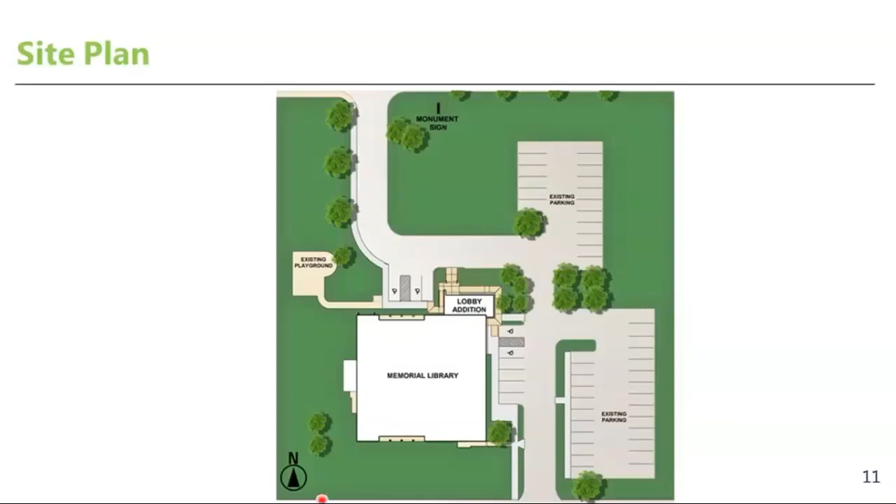Starting out on the street, on the left you'll see the new monument sign, about 15 feet tall. The area in white is the new digital board that will advertise future events at the library and let everybody know what's going on. The increased size of the sign will make it much easier to find as you're driving down the street. The materials include colorful metal panels done in blue to reflect our good neighbors at both St. Mary's and Memorial High School, and we're bringing in a base of the brick from the original building to honor it. In the distance, you can begin to see the new lobby.

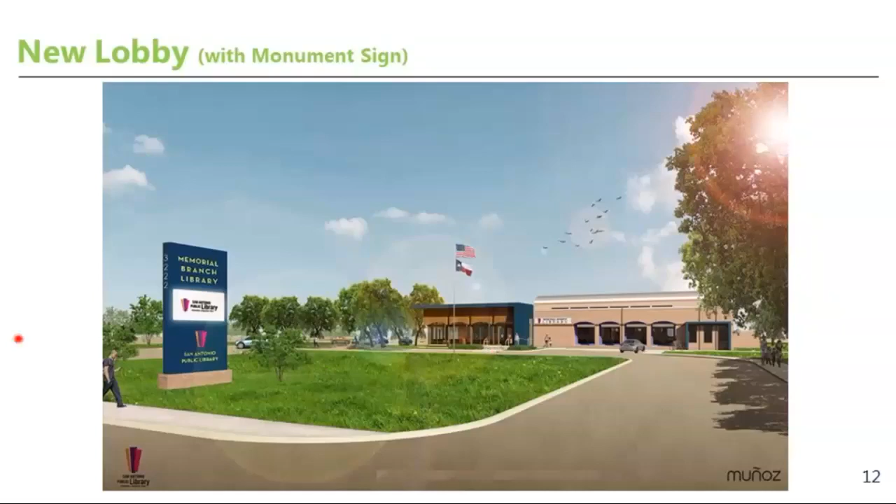Here you're moving in, driving up the drive, and you can see the metal panel element that forms this new lobby, with glass infill. So you'll have this great space with natural light. This will go on the front of the building to transform its look. We also brought in some sunshades, those stick elements you see just underneath the blue metal on the new part of the building.

Those sunshades are done with an arched shape that reflects the architecture of the original building, visible to the right. We also added new windows into the teen area there, and another sunshade element done in blue metal to tie it back to the lobby addition. In the existing window insets where the arches are, we've added some blue tile, which will help tie everything together. Everybody talked about wanting to see some color added to the front of what was otherwise just a plain brick building, so we think that's going to do a lot for the visuals.

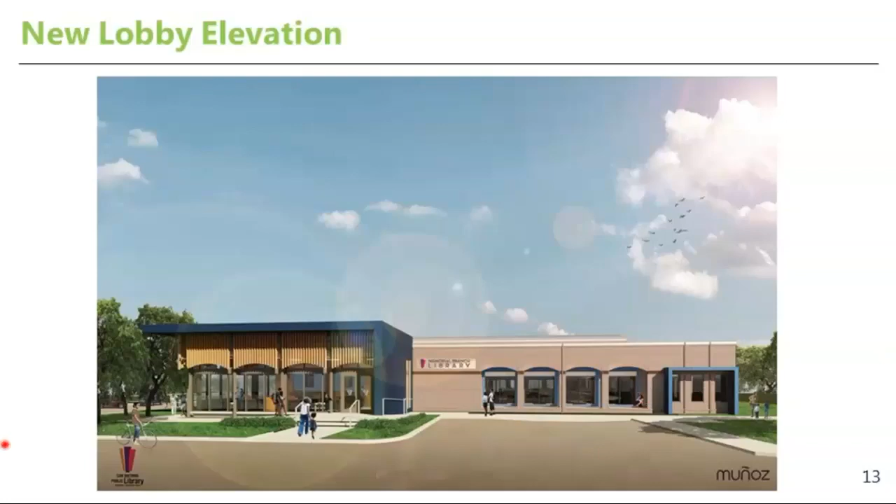Here's another angle of the front where you can really see the sunshades and the big blue overarching element that defines the lobby, along with all the new glass that will let fantastic natural light into that space, making it a great reading area.

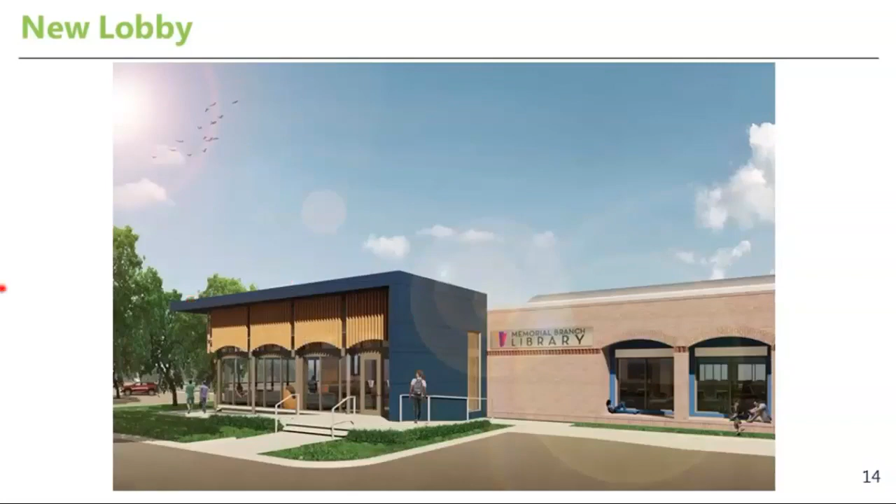Here you're stepping inside the lobby. This is an all-new addition, and off to your right is where the original building starts. We've set up this area with lounge furniture so you can check out a book and hang out and read in the shade of the tree outside, with all this great natural light coming in. Very modern—notice the rings up there, which are light fixtures with all new LED lights, bringing a whole new light quality into the space that's going to make it feel super nice.

On those existing brick arches, we've added some more of the tile that I mentioned on the exterior there. And down below that are two stainless steel elements, which are going to be the memorial monument that honors the veterans of San Antonio in this space.

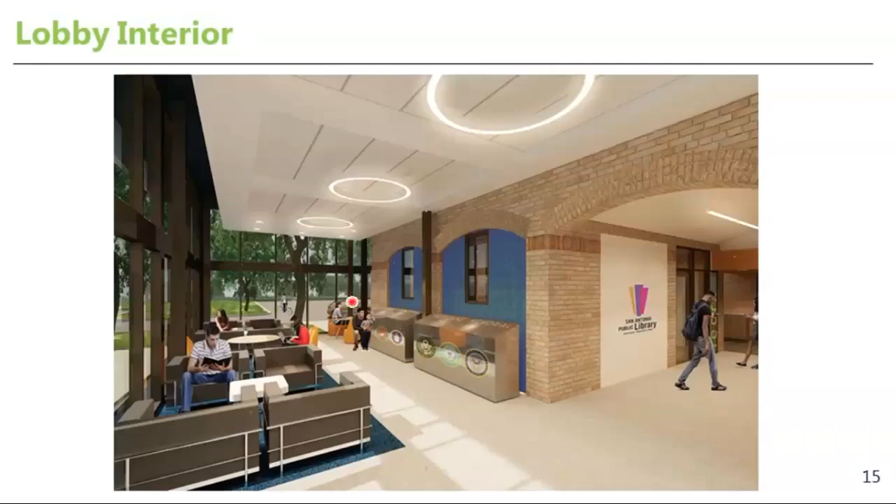Let's move in on that. We're still working on finalizing this design and getting all of the text and information that's going to be on the monument. Right now we're showing the seals of each of the branches of service, and there will be some text talking about the service of the veterans of San Antonio and what they've done to help protect our freedom here.

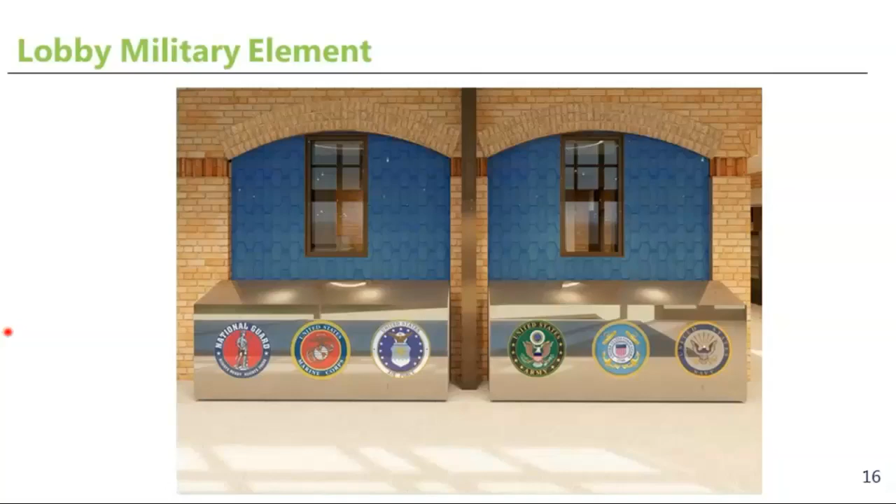And there you see, again, the blue glazed tile that we've added in the insets of those existing original arches. Let's go to the next slide.

This is one of the things I'm really excited about. We have, as Ramiro said, done a complete transformation of the interior of the building. Every material and surface that you see and touch inside is going to be new, and it's going to be great. We've really listened to the comments from the last meeting and created some new spaces within what was once just a pretty big single open space, creating specialized use spaces, which we're going to get into in just a second.

But one other thing before we go inside the building: we've also made sure we've provided several barrier-free ways into the building, so that if somebody has a difficult time walking or is in a wheelchair, it's going to be easy to get to the new lobby from all of the parking spaces and all of the various paths leading into the building in a good, barrier-free, accessible way. All of these paths are barrier-free.

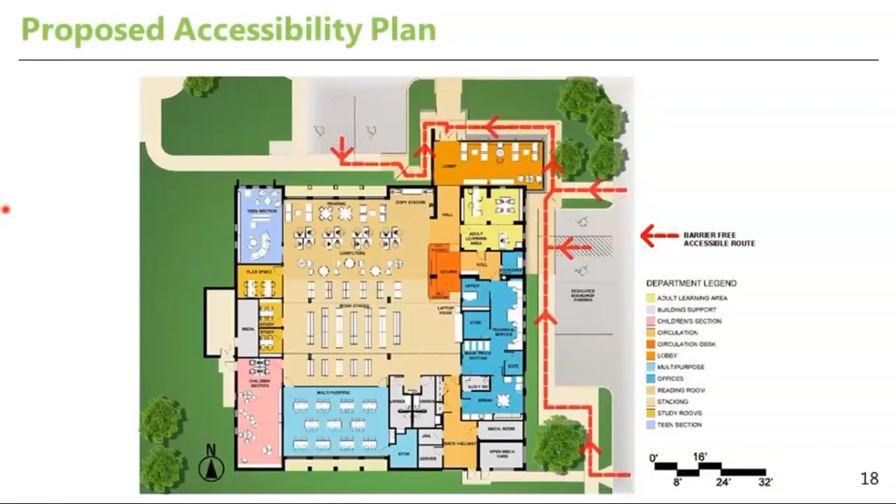You'd come into the new addition, the lobby space right there, with the lounge furniture and the monument at the back. Then you'd go into the hall, and the area that used to be the circulation desk is now going to be the adult learning area. At the end of the hall, in red, we've combined the circulation desk and the information desk together so it's going to be more efficient, and easier for visitors of the library to get any help they need right there in that one space at the new circulation desk.

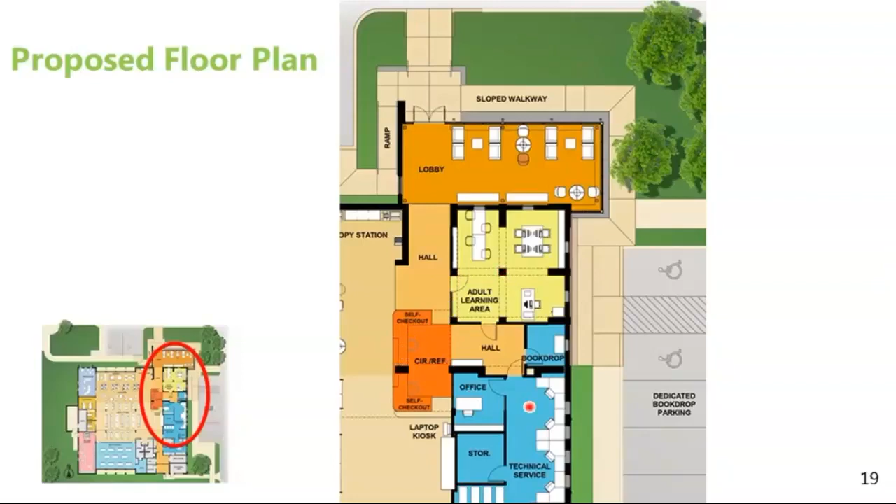And immediately below that, you'll notice we've got a laptop kiosk so people will be able to check out laptops and have real access to technology in this new building. It's going to be fantastic. Let's go to the next slide.

Okay, so we're jumping across to the west side of the building now. Again, one of the things that led to the most spirited conversation in our last meeting was the need for some specialized spaces where activities could happen that might create some noise, and being able to separate that from the main reading area.

So what you're going to see here is we've got a dedicated teen room, with its own unique furniture specially for the teens. On the right side there's a glass wall that separates it from the main reading space, so they can be having activities and talking in there without necessarily disturbing any of the other patrons. It's going to be great and allow for a lot of multiple and flexible uses within the building.

The next three spaces down, shown in that orangey yellow, are flex spaces, and then two small meeting or study rooms. Really, these are multi-purpose spaces: sometimes they can be used for group meetings, like if people are working on a group project together. But one of them could also be dedicated as a quiet room, where if somebody really wanted quiet, they could set that room aside, and the only people in there would be being very quiet, so you could really focus on what you're doing.

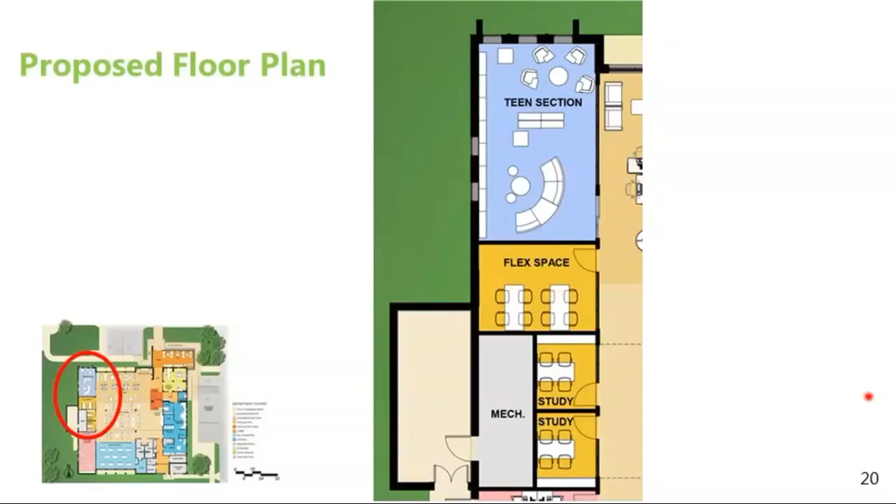So now we're moving to the south here. In the pink there is the children's area again. You notice it's got some unique and fun furnishings specific to the children's area. And again, it's closed off. It's got glass on it, but it's closed off so that if they're doing a learning activity in the children's area, it will be able to happen without disturbing other patrons in the building.

Immediately to the east of that, we've moved the multi-purpose room from its current location and made it larger. It's got great natural light on the south, so it'll have access to all those windows. On the north side it's also got windows that allow it to look into the main library. We're going to have all new furniture that's very flexible so you can push tables together and pull them apart, whether you're having a neighborhood meeting, a community meeting, or a big lecture of somebody giving a talk about a book - all those configurations can be set up in there. It's going to have state-of-the-art AV so they can show videos and slides, and all that can happen within that great multi-purpose space.

There's a storage room right off that multi-purpose space where the furniture can be stored if you want to open that space up more. And there's going to be a little coffee bar so you could serve drinks in the library if needed, in that white area just to the right of the multi-purpose room. The bathrooms you see there in the gray are going to be all new.

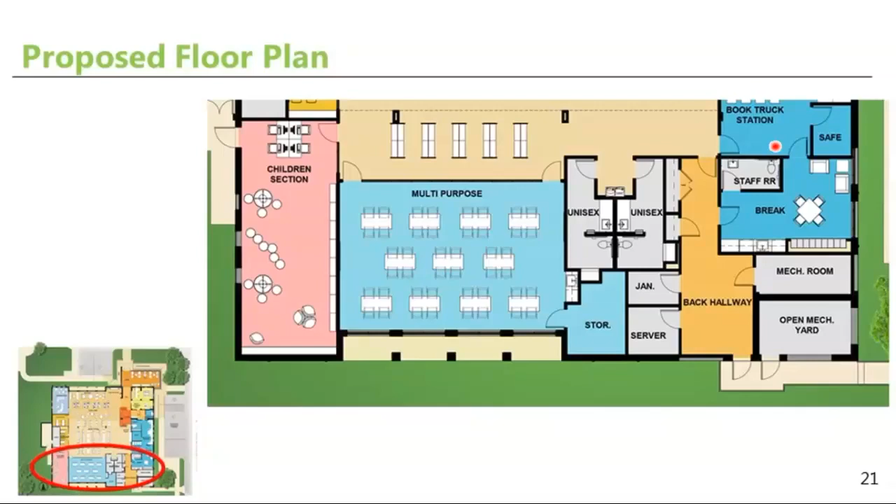And then from there we get into the spaces that are really the back of house - that's where the library staff is going to work. But I'll tell you we've worked that out as well, so they're going to be able to serve all of the patrons in the library even more efficiently than they already do. We can go to the next slide.

And then, of course, not to leave out the main space of the library, we've got the big space. We've got all the book stacks there at the south end of the plan, and we're still going to have all the books in the library. It's going to be a great space, but immediately above that area we're adding some lounge furniture. And then those pinwheel seats you see above that are all going to be computer spaces.

We're going to have a whole host of new computers in the library that are going to be great for all the patrons. They can really get online and do their research and do what they need to do at all these new computers.

And then out near the windows on the north side, we've got a great reading room where we're going to have super comfortable lounge furniture, and it's going to have connectivity so you can plug your devices in. It's going to be real comfortable and get great natural light there from the north. And all of those are going to be served by a new copy area immediately to the right of that. So if you're doing research on the computer or from a book, you can go print something or make a copy, and all that will be contained in one simple, easy-to-use area that's also within easy eyesight of the circulation desk, so if anybody needs help it'll be real easy to do that.

Let's go to the next slide.

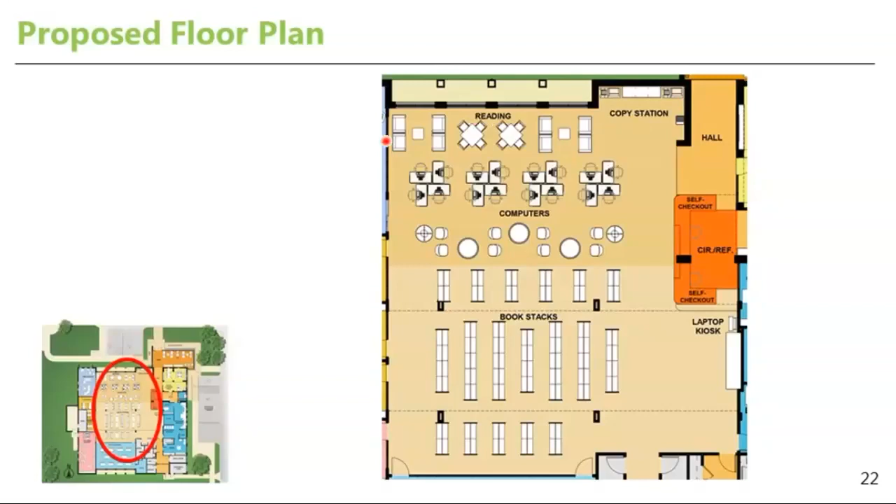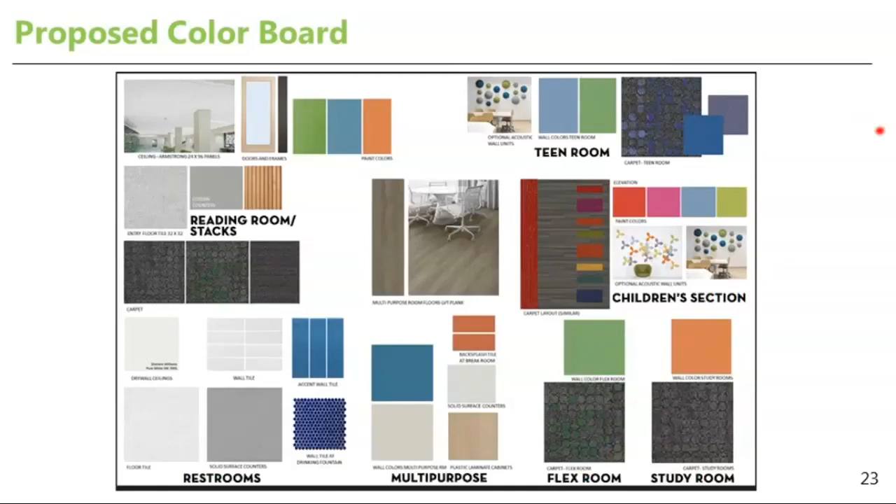So this is a materials board, again showing we're bringing some color into the space. What you're going to notice is that each room and each space in the building have a dedicated palette of materials. So what we're doing is creating little environments within the bigger space. We think that's going to add some variety and be a really fun aspect of the library. Let's go to the next slide.

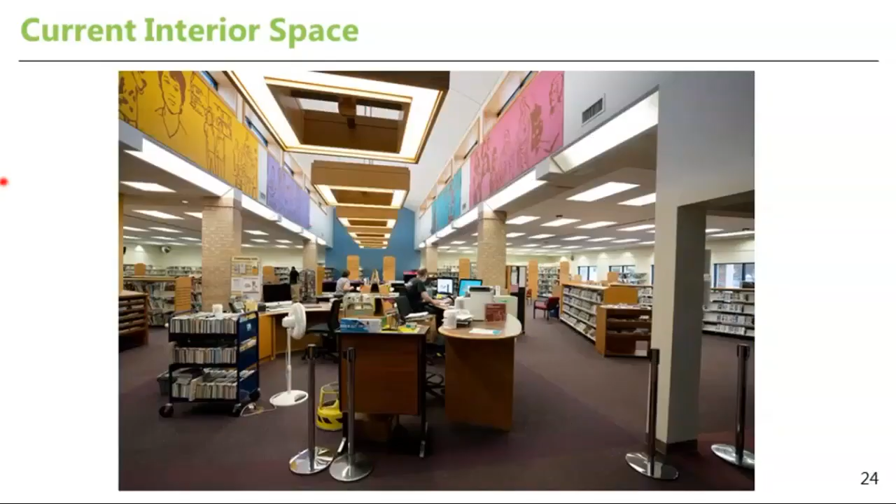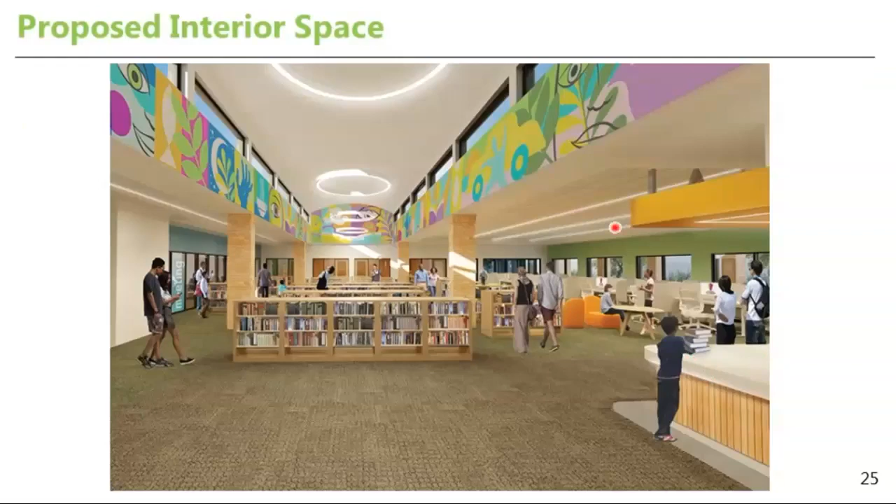If we go to the next slide. So this is looking back towards what will be the new circulation desk. So the people off to the far left of this slide are basically coming from the entrance, through the lobby, and they'll immediately see the new circulation and information desk where they can get help and be directed on where to go if they need assistance. That'll be like the command central for the space.

And just to the left of the circulation desk, you'll see the adult learning area where it says learn, which is going to be a great addition to this library to allow dedicated learning to happen in that space.

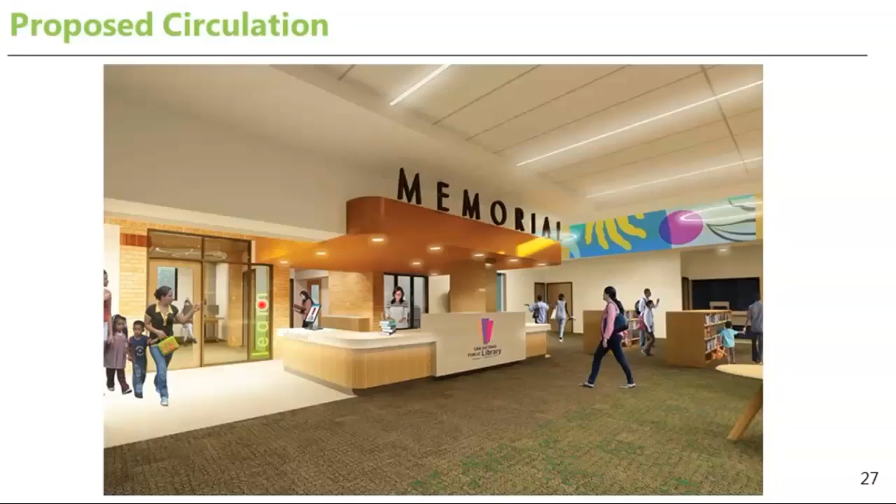We go to the next slide. Okay, so this is the south end of the building, which had some children's area and teen corner and kind of a hodgepodge of other things. We've gone in and created some new spaces here.

In the next slide, you'll see that same area, and we've got the meeting space at the very center of the slide. You'll see the children's room off to the right with the new lighting and new colors. They'll all be clearly identified with new graphics that will help people intuitively know where they need to go and where they want to go in the library.

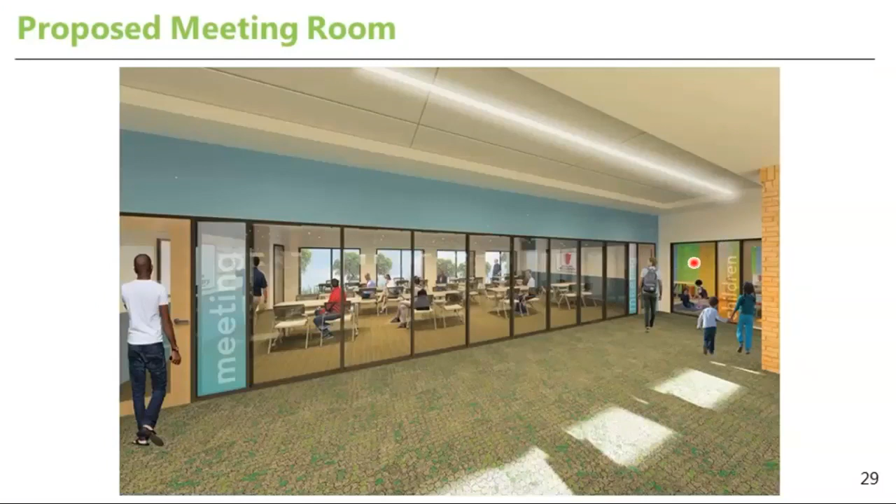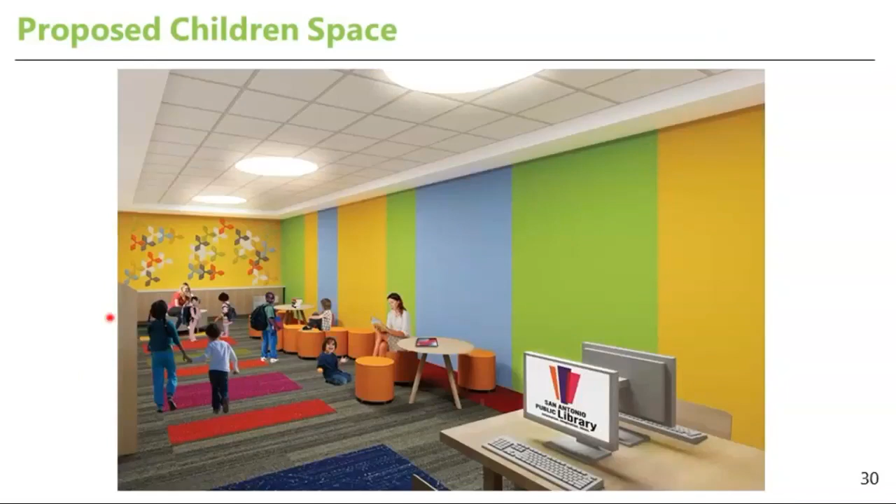Go to the next slide. So this is a view inside the children's area. You'll see it's colorful. They've got this great, fun, movable furniture. We're still working through that, but it's going to be great, just for the kids, to create their own little environment. And it's got glass so you can see into it, but it is separated so that it'll have some acoustical separation so people in the main reading space won't be disturbed by activities in here.

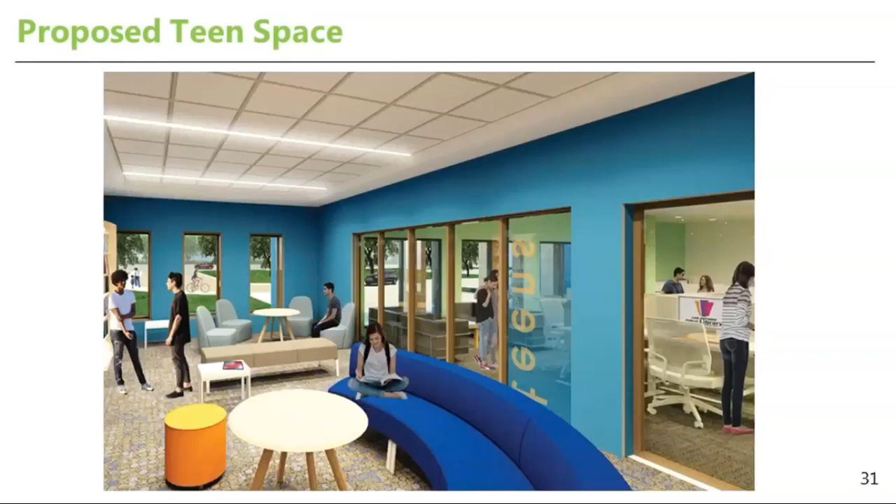And then finally, we've got the teens area. Again, a unique space just for the teens, so they've got their own space in the building, and it's going to have furniture that's special for them. You can see all the glass looking back out to the main reading room, but it'll be separated so that if they're working on a project or talking about something in their space, it won't necessarily have a sound impact on the people in the main room.

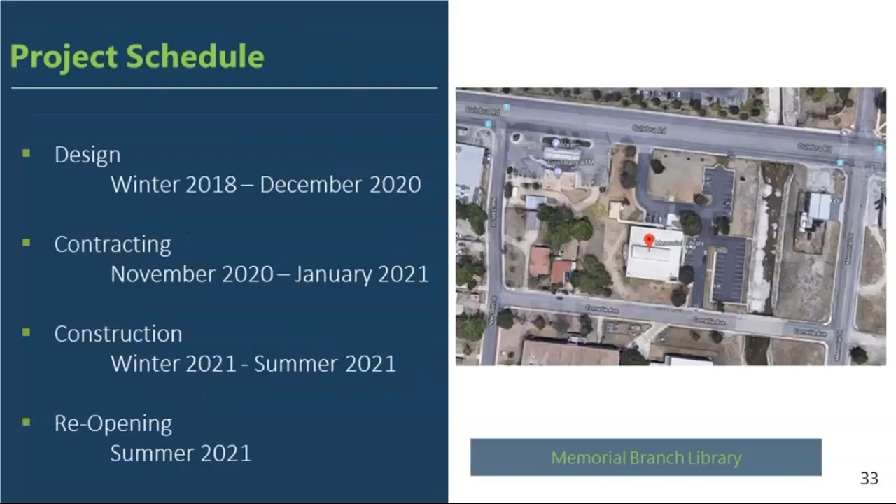So let's go back to where I was at the schedule. And I believe that concludes my part. What's the next slide, Jessica? Questions. So we're now with Q&A, questions and answers.

I'm happy to respond to any questions. I may ask members of the library team or others, Jeff perhaps, to help me respond to any questions that I may not be able to answer. So, Jessica, do we have any questions? Yes, sir, we do. Okay, let's get started then.

The first question is, would there be more parking spaces, more computers, and copy machines for anyone to print or scan? I believe Kathy, who's Assistant Director for Support Services, including capital projects, will be able to respond to that question. Kathy? Yes.

So there will be a multifunction device as part of the adult learning area that will allow the community to print, copy, fax, and scan. So that's a yes. In terms of computers, we're going to be almost doubling the number through a laptop dispenser. This is a device that'll hold a dozen computers. Folks can come in and either use a desktop or check out a laptop from the dispenser and use it anywhere in the branch. So we're going to be almost doubling the number of public computers. We are not, however, adding parking spots in this project.

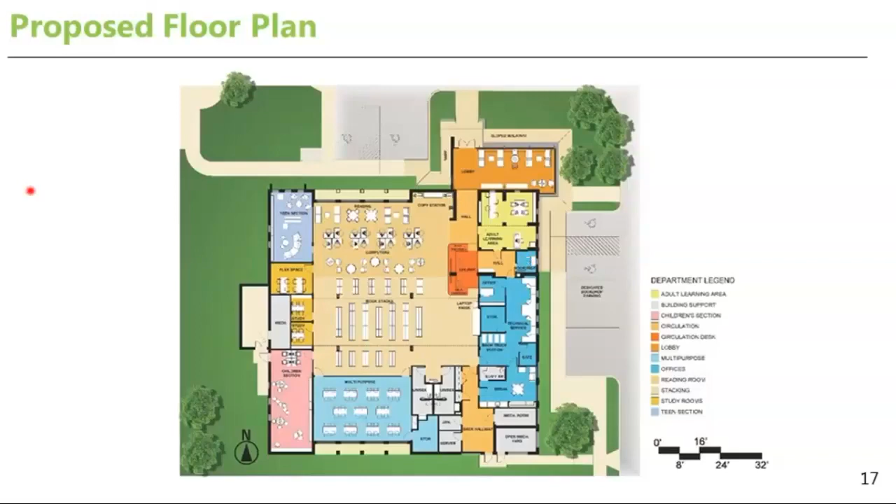Thanks, Kathy. Next question, Jessica. What is the status of the traffic light in front of the library so patrons can turn in and exit safely out of the parking lot? Early in the presentation I indicated that I plan to engage the transportation department so we can look at traffic flow. We understand there's risk because Culebra is very busy and getting into the library parking lot can be a challenge. We want to look at it holistically with transportation and come up with solutions in partnership with them.

The next question: what will happen to the small playground? It will stay there. As part of our plan, I indicated to participants that the next priority, which isn't funded with the same budget, is what improvements we can make to the grounds. We looked at the playground, and I told staff that at minimum we need to paint it. It will remain there and available for the community; we just need to refresh it, and we're working on a plan to accomplish that.